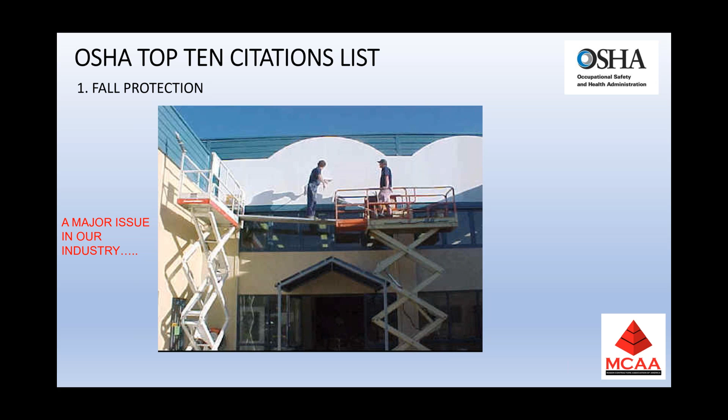Fall protection is always, as I said, number one. It's still a major issue in our industry. And no matter what kind of work you're doing, there are always people out there who are trying to push the envelope and do crazy things that involve problems with fall protection. And I think you can all point to examples that you've seen over the years. And there are overt examples where you look at it and you think, my God, who would do that?

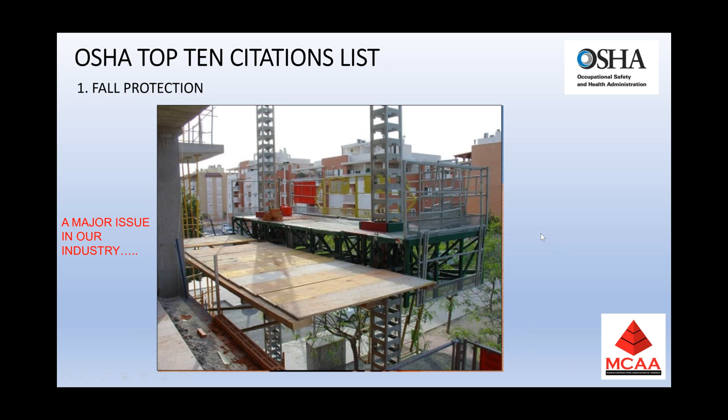There's one category. But there's also a category which is a little more subtle to pick up on. And that involves being able to identify sometimes what is and what isn't a fall hazard and what needs to be done about it. So there are also more subtle issues that need to be resolved.

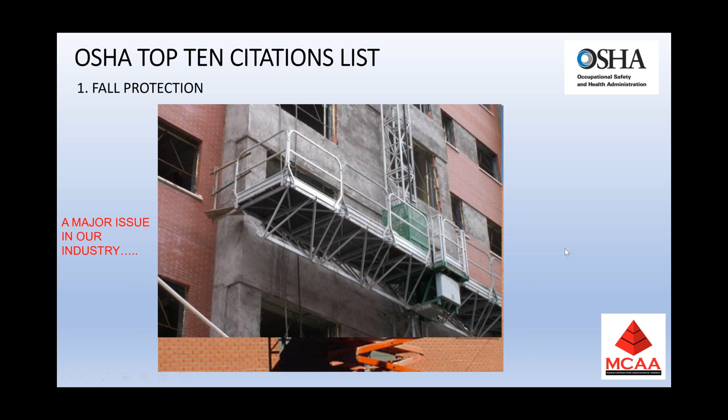So looking at fall protection, in 2018, there were 5,250 fall deaths. Now, that's 100 deaths per week and 14 per day. That's an unbelievable number of fatalities caused by falls. And falls, quite rightly, is in OSHA's Fatal Four list. OSHA produces a Fatal Four, which are really the main focus. And falls is number one.

Struck by objects is in the Fatal Four. Electrocutions makes it into the Fatal Four list. And caught in/between. And if we look at the Fatal Four fatality numbers, again, we can see that falls are far and away the majority of the Fatal Four list, 33.5%, compared to the next one on the list at 11.1. So falls are absolutely hugely significant, and OSHA pays attention to that.

OSHA has just completed, again this year, its Stand Down for Fall Protection national campaign, which has been going for some years now. It's a huge issue. It's still a huge issue. It's always been a huge issue. And it's something that employers really should pay attention to, because OSHA are continually paying attention to it.

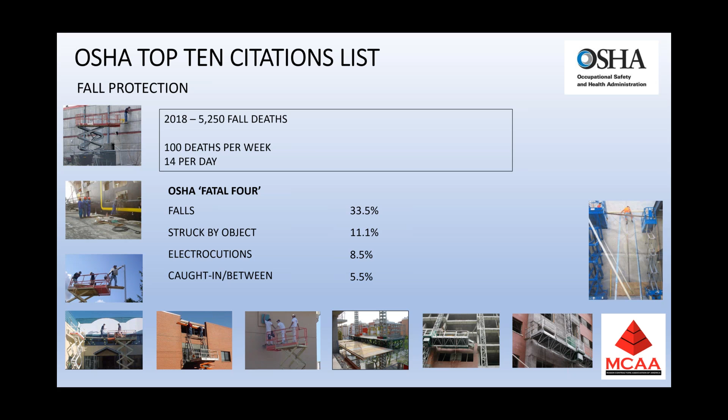There are some questions to ask when assessing fall protection and issues. I think the first thing that employers need to do, or make sure that they do, is they need to know what's in the contract requirements for fall protection. General contractors will refer to fall protection issues in the contract. And so it's incumbent on an employer to know what is going to be imposed on the job site that they intend to work on.

For instance, has the GC enforced additional rules that need to be taken into consideration? Do these additional rules work for the scope of work? For example, the GC might enforce a 100% tie-off issue. And that's a significant question to deal with, and we'll talk about that further on in this presentation.

Another question is, have we addressed the resolution of these issues before mobilisation? In other words, do we know what we need to do, and have we facilitated for it before we step foot on the job? Also, we need to know if we have a site-specific and task-specific fall protection plan. Have we addressed all the fall protection issues on the project? And is the GC in agreement with our fall protection plan?

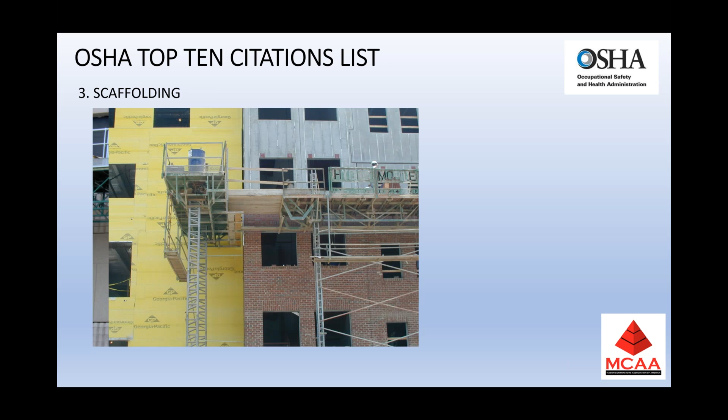Number 3, one of our favorites, is scaffolding. And there are many examples of substandard scaffold. We kind of see them on just about every job site. But there are questions to ask in the erecting and the use of scaffold. First of all, again, do we have a site-specific and task-specific scaffold plan?

Does our scaffold plan address all the fall protection issues? Have we identified in the plan any planking, open areas, tie-off points, any issues with regard to any of these areas? Is the GC in agreement with our scaffold plan? It'd be pretty useful to know that beforehand, before you turn up and the scaffold gets erected and the GC then has problems and your mobilisation plans are up in the air because the GC hasn't bought into your scaffold plan.

Was the person who designed the scaffold qualified? Again, qualified, not competent. And again, it may be useful to bring in independent expertise or advice if you're not sure, or if you feel that internally you don't have qualified status to be able to put the scaffold plan together. Have you addressed ground conditions, stability, tie-in points, capacity in advance of mobilisation? Those all affect the scaffold design.

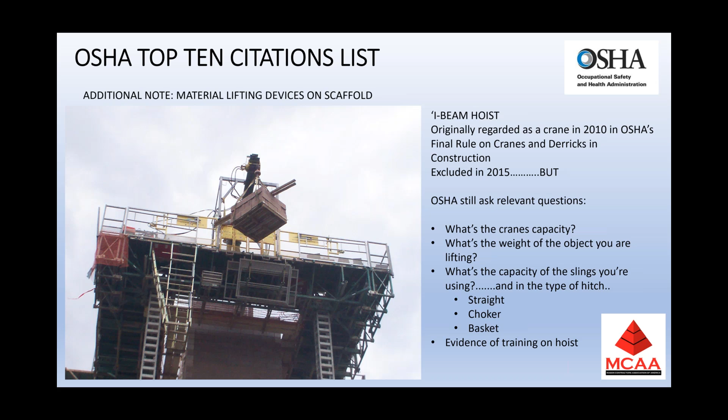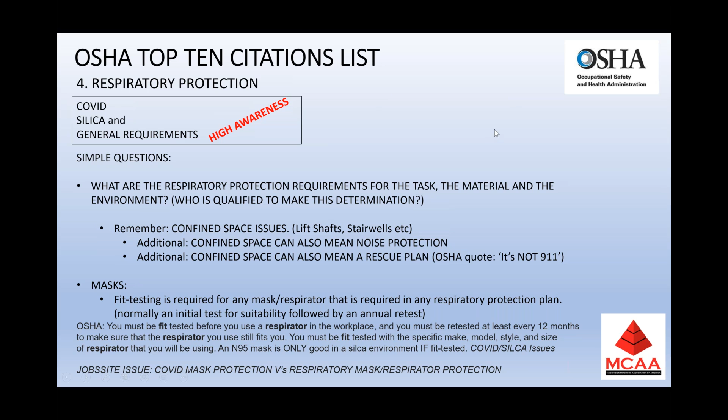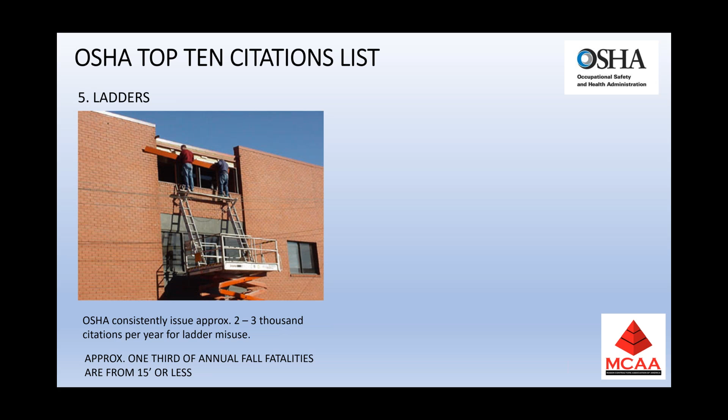I'd like to share this picture with you. The guy in this picture is quite proud of what he's done. And when you look at it, it's a pretty ingenious way to use some ladders. And it looks like a humorous picture until you see a number of things. Obviously, he's hopelessly exposed up here. There's obviously no engineering design beyond what he's doing. It's clearly a misuse of the equipment. And also feel sorry for the poor guy who's sitting in here as the counterweight for the ladder system.

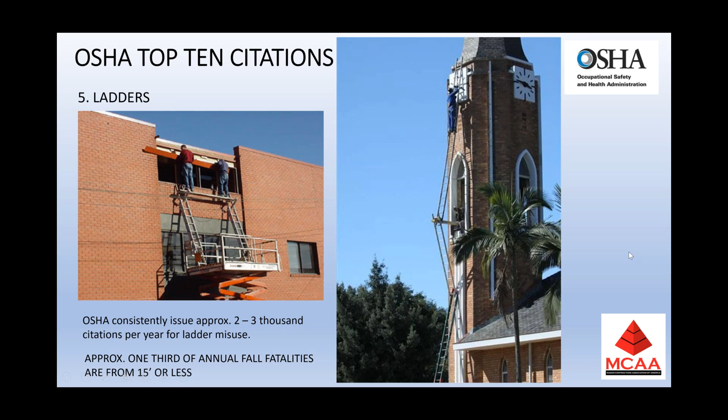And again, as I previously referred to, there is OSHA information available on the safe use of ladders. Quick card again on portable ladder safety tips. And again, as I said already, this is free. And you know, downloading these quick cards for each of your employees for the relevance of the work that they do and making sure that they've read them and understood them is great information. Not only is it great information, but you're using OSHA published material to give to and to inform your employee. Fantastic resource for an employer.

As opposed to fall protection, training gets its own line in our top 10 from OSHA. And that's because there are important aspects to consider when it comes to fall protection training. In order to train someone, you've got to decide what fall protection measures are required. You've got to then decide what personal fall protection equipment is to be used. And remember, we need to know that someone is qualified to make those decisions and determinations.

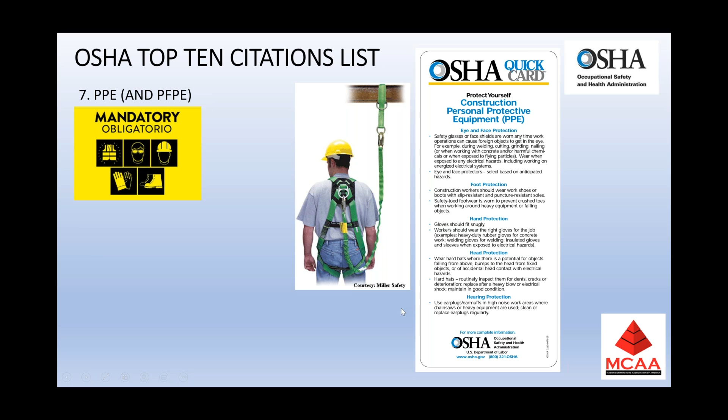And when it comes to PPE and PFPE, something important that everybody should remember. When you issue PFPE and PPE to your employees, tell them why they are wearing it. Point out the hazards. Make sure they understand why they are wearing it. Make sure they understand what constitutes proper use. Make sure they know how to inspect their PPE and their PFPE. And it's also, again, important who decided what was appropriate for each hazard. The whole question of qualification again.